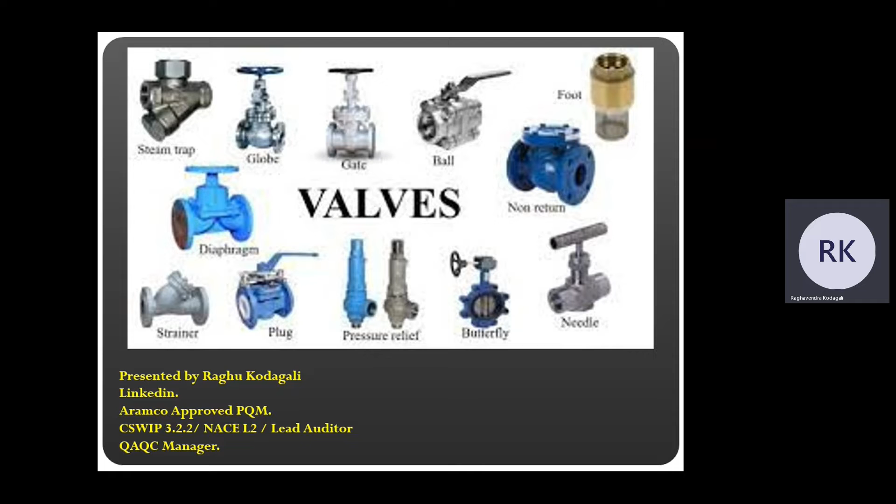We use a lot of industrial valves in the oil and gas sector, so valves are very important components in any piping system. Any QC inspector taking up CSWIP 3.1 will ultimately become a welding inspector, but also doing welding inspection, another part of the job is piping inspection. For piping inspection, you can take up other courses like API 570, but naturally you will have to learn these individual items. So this presentation will go a long way to help you understand these things. Let's proceed.

A lot of valve related information in this. Valves are mechanical devices specifically designed to direct, start, stop, mix or regulate the flow, pressure and temperature of the process fluid. Why do we call it process fluid? Because in oil and gas or any kind of industry, pharma or anywhere, the liquid that is being transported or is going to become a product is called process fluid.

In 1681, the first safety valve was invented by Denis Papin, and this information is historically important. By 1840s... so in the 17th century, we already know that in Europe the Renaissance was happening and a lot of developments were happening scientifically, so those days all inventions started.

By 1840s, the first valve patent was granted in the United States, and it went to James Robinson for his gate valve, one of the first valves which came into being, the gate valve, which got patented. So amongst all the various kinds of valves, you have to know that the gate valve got the first patent. In 1846, the globe valve design was developed and patented by Walworth.

And that's worth knowing. The Mercedes car built around 1901 introduced a butterfly valve in the fuel intake linked to the accelerator pedal, and that was a very big development. You have an accelerator where you are going to inject fuel into the engine, and to do that, Mercedes invented the butterfly valve, and that's how the butterfly valve first came into being.

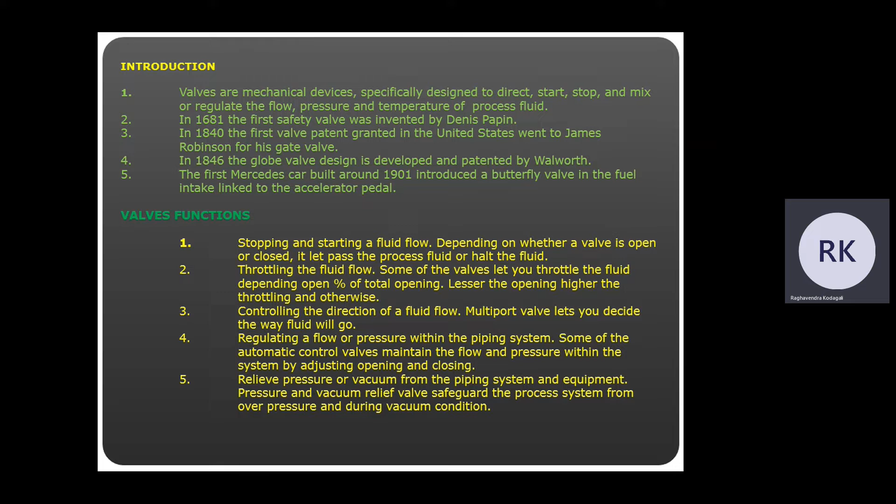Pressure relieving or vacuum relief from the piping system and equipment. Pressure and vacuum relief valves safeguard the process system from overpressure and during vacuum conditions. Ideally the valve functions not only as starting and stopping the liquid, but is also used as a safeguard mechanism, and to regulate the pressure, and during a vacuuming condition happening somewhere, the other side the valve can be kept a little open so the vacuum does not become so hard that it damages the whole system or piping.

So what is the basic construction of a valve? You can understand valve based on their construction, body construction also. The body is the main pressure containing structure of the valve and contains the valve internal parts that come in contact with working fluid. That is what the body's function is.

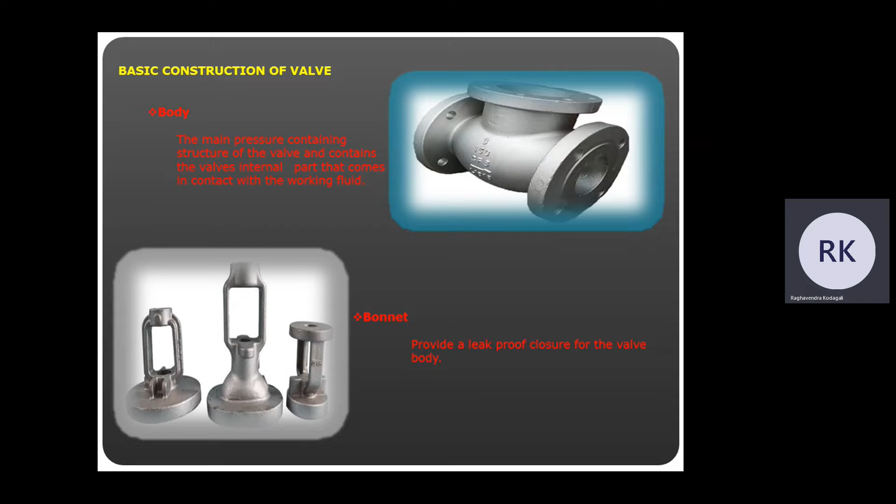Then on top of the valve, you will always see a bonnet, typically like a bonnet of a car, always on the top. It provides a leak-proof closure for the valve body. Between the valve body and the closure mechanism, which is either a disc or a handle, you will see a bonnet housing these kind of things with a seal, and it is leak proof so that it will provide valve opening and closing easily without any leakage.

Also the valves are classified as per the discs. What function does the disc have? The disc is a closure member of the valve, rests on the seat ring and is connected to the stem, which slides or screws up or down to throttle the flow using the handle. That's the function of the baffle.

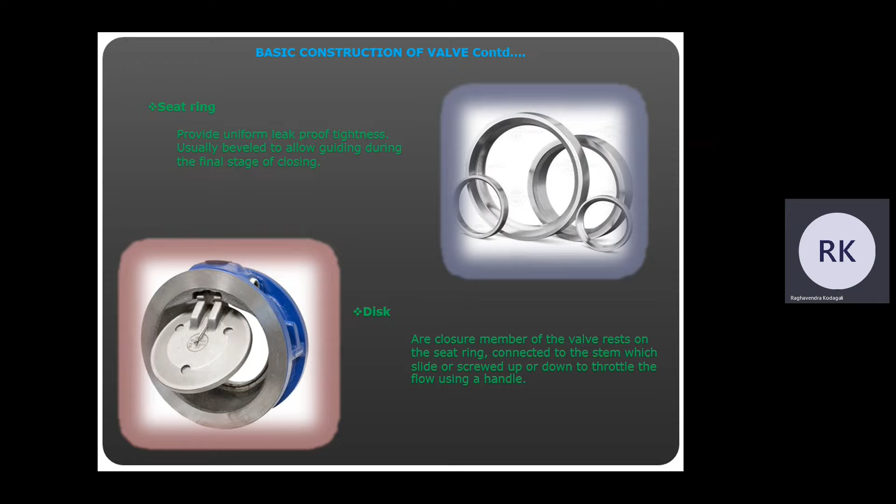In this case, we are showing you a check valve. This is like a non-return valve. The fluid will pass from one direction, and on the other side, if the fluid tries to go back, this baffle will close and it will not allow the fluid to go to the other side.

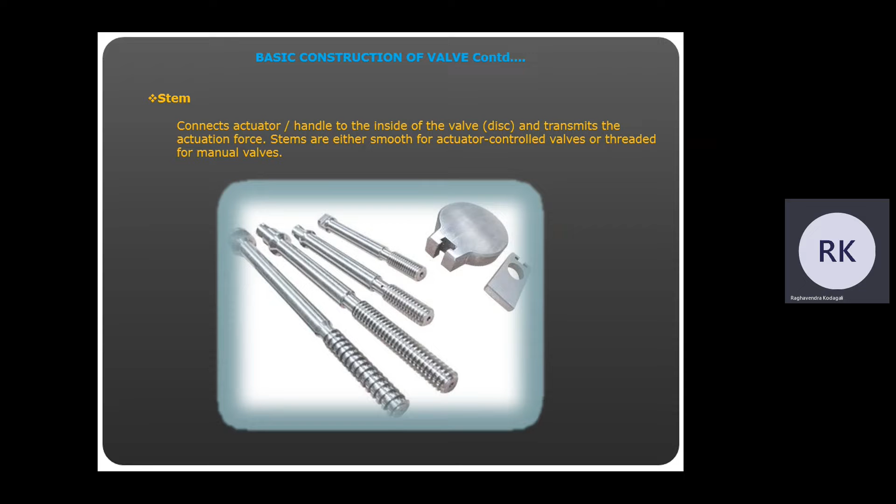So let's see the stem. In any valve, the closure mechanism is by a stem, because the operation of the baffle or any gate depends on this stem for operating it. It connects actuators or handles to the inside of the valve disc and transmits the actuation force. Stems are either smooth, for actuator-controlled valves, or threaded, for manual valves. You need to know this very precisely.

Let's see the classification of valves based on end connections. You can have different end connections: beveled end, screwed end, flanged end. Based on end connection, valves can either be screwed or threaded that connects with matching thread on the pipe. Small bore valves used in instrument connection or sample points have a threaded end. Majority of valves used in piping have flange type ends because flange type allows bolting, and you can remove the bolt anytime for shutdown during maintenance, or if you want to change the flange, easy. Welded type or threaded can also be changed easily, but mostly flanged type is used because you cannot guarantee the threaded type will not leak during operation.

Also, butt welded valves are used in very high pressure and high temperature service. In high temperature service, we see that threaded valves are not used. Rather, they use welded type because it gives complete guarantee due to the temperature and pressure range, and the need to withstand that pressure.

Socket welded valves are also used in low pressure systems. You might have seen many socket welded valves; these are usually low pressure systems. Many times you can see socket welded valves also used in housing and buildings. Check valves and butterfly valves are available in wafer and lug end construction. These type of ends are used when space is a constraint, so it's also because of the process requirement, basically, whether check valve or butterfly valve will be used.

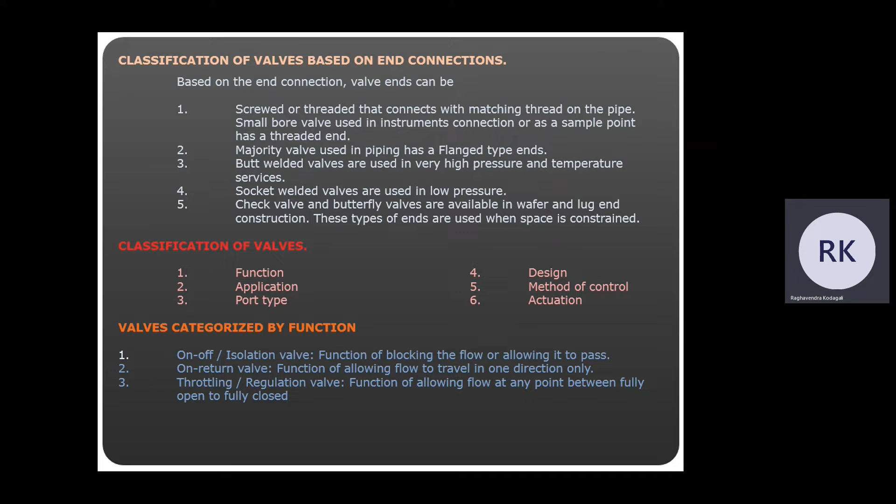Valves categorized by function: on or off isolation valve, function of blocking the flow or allowing it to pass. Non-return valve, function of allowing flow to travel in one direction only. And throttling or regulation valve, function of allowing flow at any point between fully open to fully closed.

Then for regulation, that is flow regulation valve: globe valve, needle valve, butterfly valve, diaphragm valve. So you can see diaphragm valve will do isolation also, and it will do regulation also. You need to know that. Ball valve is also having dual purpose.

Here the globe valve has the unique function of regulation. So globe valve is not doing isolation, it is doing regulation. Then there's ball valve, plug valve, and pinch valve. Pinch valve is also having dual purpose. What about safety relief valve?

Pressure safety relief valve and vacuum relief valve are the two types of relief valves you will see in the processes. And also non-return valve. Non-return valve, swing check valve, lift check valve, both types of check valves are there. They are called NRV or non-return valve.

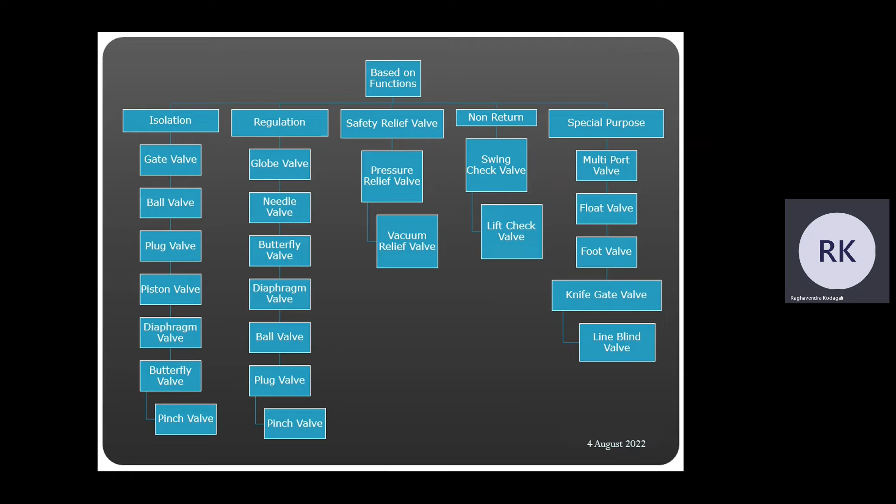And then there are special purpose valves built for multi-port valve, float valve, foot valve, knife gate valve, and line blind valve. For doing blind, they use the line blind valve. So these are the various types of valves and their segregation.

Now let's see how each one is constructed and how it looks like. So valve types used in the oil and gas industry or for process piping applications can be classified in multiple ways. Valve categorization by disc type.

Linear, first we will see a linear motion. So gate valve, you can see the picture of a typical gate valve. This is how a gate valve looks like, and many times a gate valve will have directions marked by a forged arrow. So gate valve is mostly used in piping and pipeline applications.

So you see how the construction is. This is a typical drawing. You can see this is the stem which will drive the disc inside, and it will completely close the flow from both directions.

So this one is the hand wheel. The top one you can see is the wheel, and the wheel has the stem which, when you rotate the wheel, will either rotate or go up or down. This is locked in place by the stem nut.

This is the stem itself, and there is a gland flange and gland bush that allow no leakage from the piping valves towards the stem. It will seal the thing basically. Then there is gland packing, back seat, bolt nut, bonnet, gasket. The bonnet houses all this and properly seals the valve. Then there is a gasket at this point.

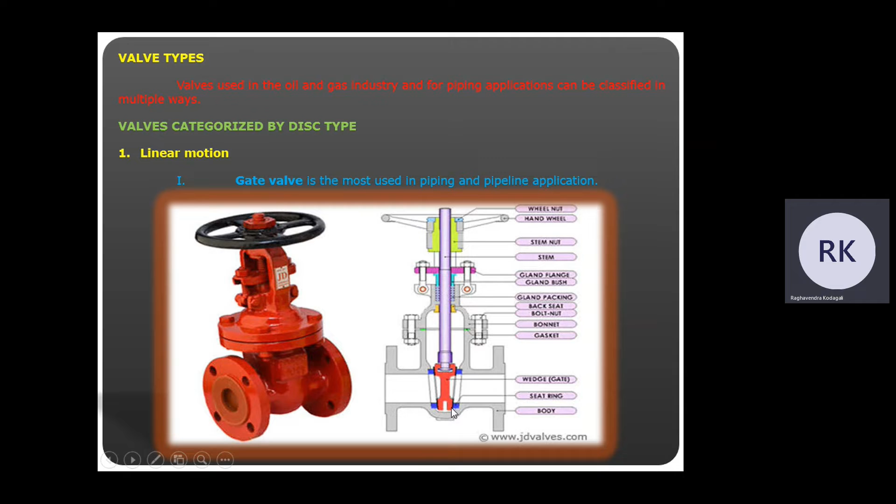There is also a back seat, you can see the yellow color. This allows that there will be no flow back charge into the handle side. On the valve side there is this wedge which is called the gate, and then a seat ring. This is the seat where the wedge will sit, and there is a seat ring for that. And of course this is the whole body in which it is housed.

So globe valve is used to throttle or regulate the fluid flow. In a globe valve you can see there is a circular rounded shape in between, and that's how you will identify them. Globe valve also will have some kind of direction mark, and many times it is unidirectional, but can be used either side. So you can see this is the handle, and then this is the drawing.

You can see the construction where it was straight. This one has an angular movement upwards and then downwards and sideways. You can see the direction here; the direction of travel is from this side to out. Then in between you can see the disc and seat, and the stem, and then the bonnet where it is housed, and then the hand wheel and the wheel nut.

In this picture you can see this is flanged end, whereas this is screwed or butt type.

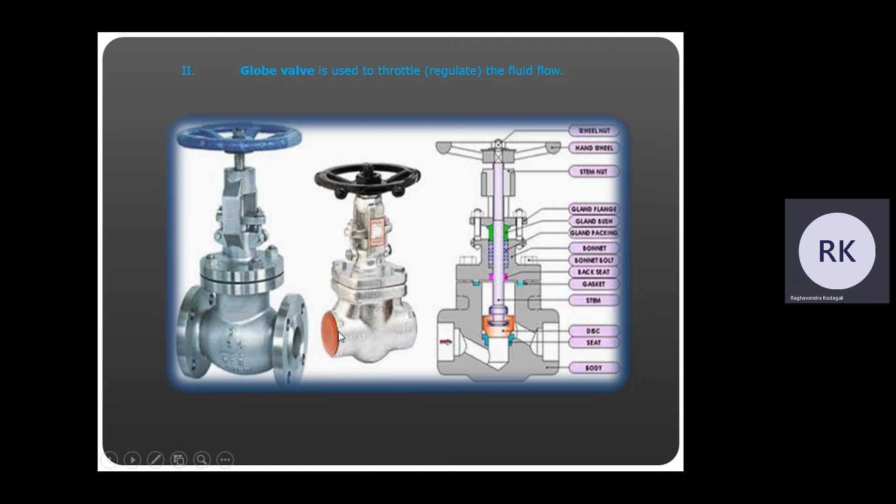This next slide is for the check valve. Check valve is used to avoid backflow in the piping system or pipeline that could damage downstream apparatus, pumps, and compressors. You can see, just like globe valve, this also has one kind of inlet, then there is a stoppage here, and then it will let it out. You can see if you cut the check valve and look, this is how it will look.

So this is the waffle, or where it will swing when the flow is on this side, and then it will not come out. So it will allow only one direction of travel of fluid.

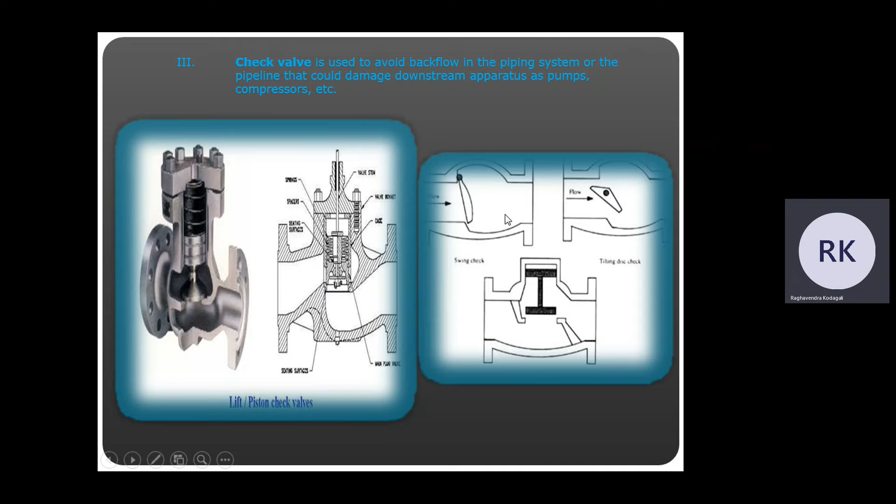The next valve is pinch valve. Pinch valve is a linear motion valve that can be used for throttling and shutting off applications in piping application, process applications that handle solid materials, slurries, and dense fluids. That's the reason why we don't see pinch valve used often in refineries and oil processing platforms. Usually in land refineries you will find this, but the application is very limited to solid materials, semi-solid liquids, slurries, and dense fluids, and that's why we don't see much use of these kinds of valves. But you should know that this kind of valve exists.

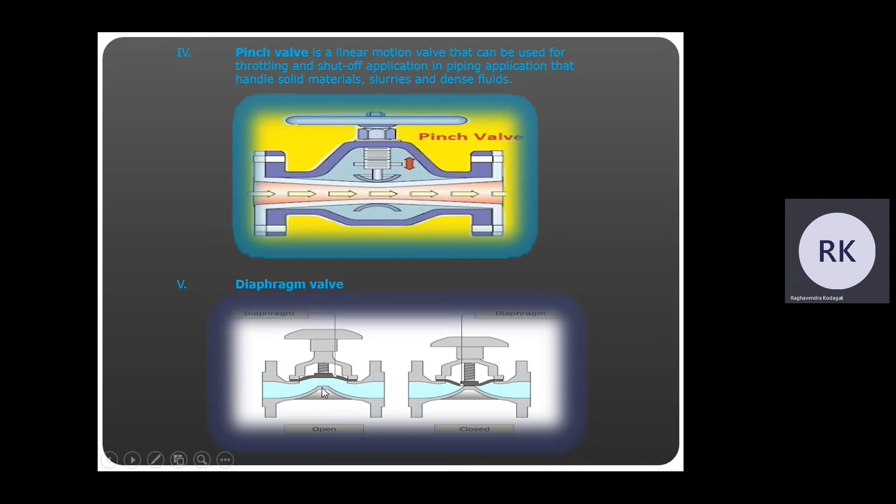Then there is a diaphragm valve. You can see how clearly there is a diaphragm which, when pressed down, is able to close the flow of direction.

You can see this cut section of pipe, and how the waffle, when you turn this stem, opens like a waffle, and then firmly sits in one location and swivels from there. This is the typical valve arrangement, with the rubber sealing and this plate completely dressed with a smooth finish. When you close it, it completely seals off against the rubber and shuts off the flow from one side to the other.

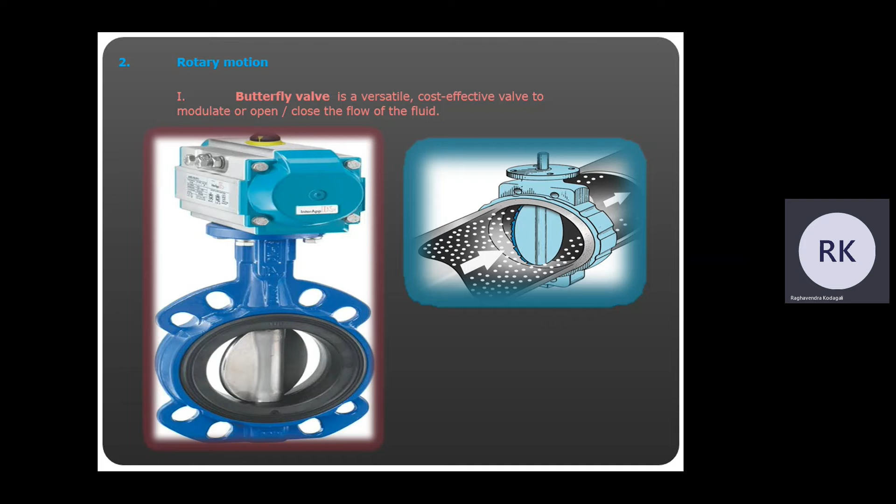The next valve is the ball valve. It has a circular hollow section in the ball, which is encapsulated in the body. Since it is in a circular ball shape, it's called a ball valve. It has a handle, and you simply turn it 90 degrees, and the operation happens slowly. See, this is completely shut off, this is slowly opening, half valve, and this is fully closed, and the blue one is fully open.

So ball valve construction is this way, and it also has the bonnet and the body, completely housed inside a stainless steel body here in this case, but there are also carbon steel ball valves.

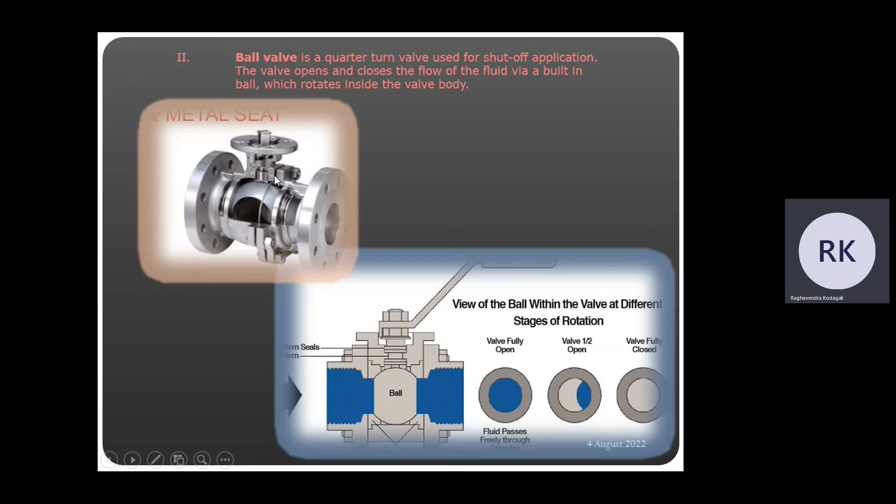There is rotary motion control. A plug valve is classified as a quarter turn valve for shut-off application. Eccentric valves and swing check valves are other kinds of rotary motion valves. So these valves operate using the rotary motion of the disc inside.

What about quarter turn? The device requires approximately a quarter turn motion, from 0 to 90 degrees of the stem, to move from fully closed to fully open position, or vice versa. So in a quarter turn valve, if you turn the handle by a quarter, which is 90 degrees - 360 degrees, quarter is 90 - the valve opens or closes.

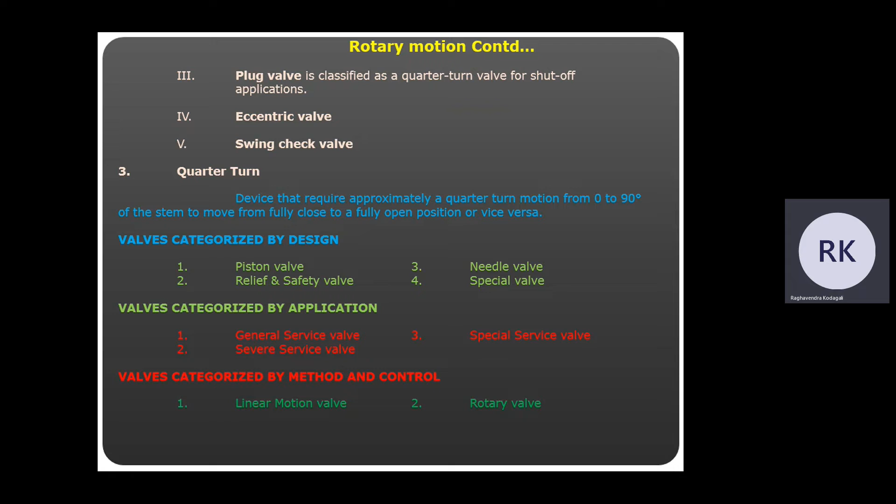Valves categorized by design: piston valve, relief safety valve, needle valve, and special valve. Valves categorized by application: general service valve, severe service valve, and special service valve. Valves categorized by method of control: linear motion valve and rotary valve. Valves categorized by port size: full port valve and reduced port valve, so you have full ports and reduced ports available in valves.

Classification of valves based on the type of actuator: based on actuation, there is pneumatic actuation, hydraulic actuation, and electrical actuation. A manual valve is operated manually by a lever, wheel, or gear, while an automatic valve is controlled by an electromechanical device called an actuator, which may be electric, pneumatic, hydraulic, or gas-over-oil, called an actuation valve.

Based on operation, manual valves can be hand wheel, hand lever, gear wheel, or sometimes even chain type. But in actuation, you can have power or automatic operation. In power, you will have electric, pneumatic, air, hydraulic, and solenoid valves.

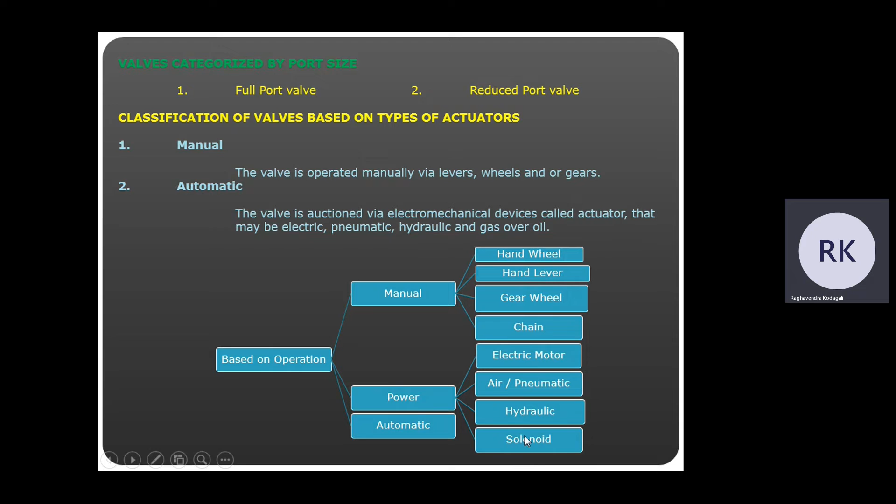So let's see how these valves are inspected and tested, because every inspection is carried out by the inspector, so he should know all the details.

When you go to the valve manufacturing facility, not every QC inspector gets this kind of experience and inspection opportunity. Very few people get to go into the valve manufacturer's place and do inspection. The purchaser will specify in the purchase order his intention to inspect the valves and witness tests and examinations at the manufacturing plant. The purchaser's inspector shall have free access to any part of the plant concerned with manufacturing the valves whenever work on the order is underway.

So what happens is when there is a large order of valves and a very big size of order, the client - for example ADNOC or Saudi Aramco, or any large EPC company or field operator - since their project is big size, they would want to witness this activity.

So not only will the client and end user witness the inspection, many times a third party will also do the witnessing. In that case, there will be an ITP, and a QC inspector will be in charge of the inspection for the vendor. The vendor will have that ITP, and then they, along with the valve manufacturing company, will chalk out which stages the inspection will be done, when the RFI will be sent, and the whole process of RFI will take place.

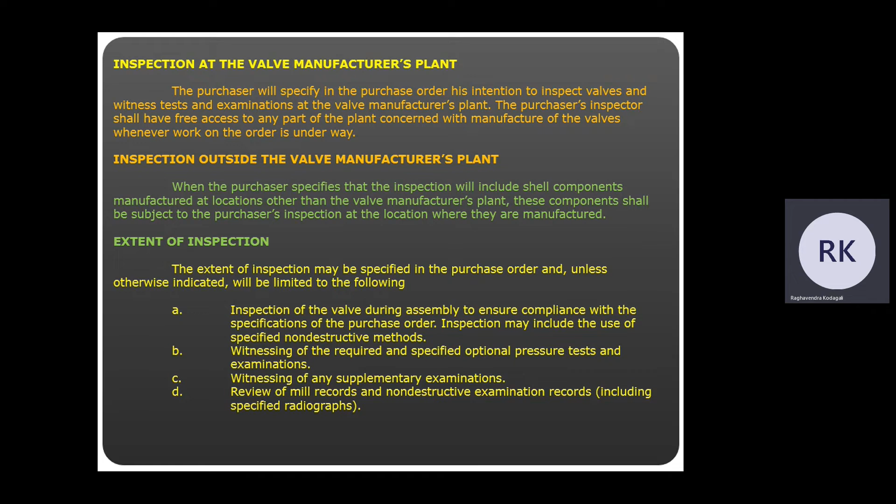So they may want to witness the entity also, because since it is a cast valve or forged valve, they need to see the proper processes. So witness of the required and specified optional pressure test and examinations, then witnessing of any supplementary examinations, then review of MTC mill test record certificates and NDT records, including radiography or UT results.

And if you place a purchase order for a valve which requires DNV acceptance, then that DNV third party will come into play. If you are using this valve in marine application, then the DNV marine third party will have to be called. Then if there is a PED valve, the third party must be a PED notified body. What I mean by PED valve is many times valves are made to ISO standard and supplied to a European company or European project - that time ISO standard requirements are there along with PED standards, and that's why you need a notified body. A notified body is the third party which is basically in touch with the European country's notified bodies. And that's why the QC manager and QC engineer will know that, and they will write all that in the purchase order.

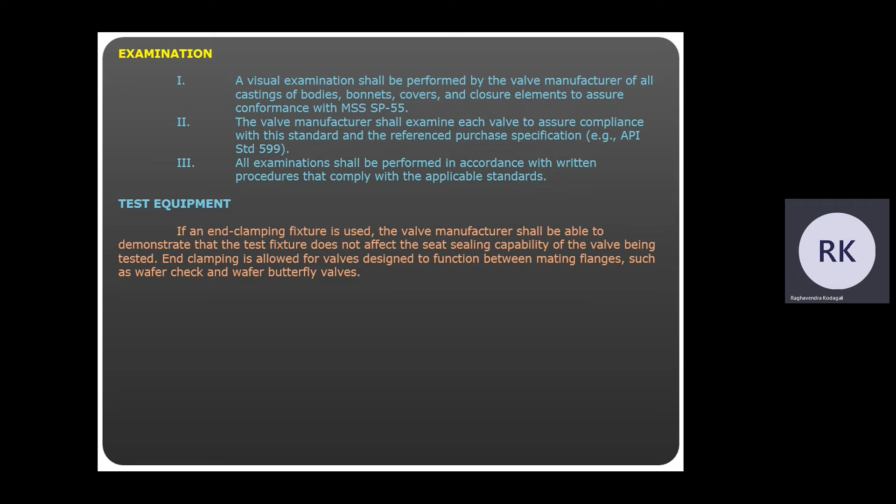So this testing is also very important, and very experienced and knowledgeable persons go for witnessing the hydro test. Basically for the hydro test, they make one test bench where they may put 10 valves together and test in one go, or they may test individually.

So, pressure test of the valves below 4 inch and above 4 inch, for below 1500 pound and then below 600 pound flange rating - you can see that the requirement for shell is required for all things like gate valve, globe valve, plug, check, floating and butterfly valve. But backseat test is applicable only for gate and globe valve, and not applicable for valve types like plug, check, floating ball, and butterfly valve. So you should know this.

If you want, you can keep this table in your office, whoever is doing valve checking always. Low pressure closure is required only for gate valve. It's optional for globe valve. For plug valve, it is required. Again, it's optional for check valve. It is required for floating ball valve and butterfly valve.

Then high pressure closure test is optional for gate valve, plug valve and floating ball valve, but it is required for globe valve and for check valve also.

So let's see the notes also. The back seat test is required for all valves except for bellows seal valves that have the back seat feature. That is because of the make and construction. Not all valves are required for the back seat to be tested.

For lubricated plug valves, the high pressure closure test is mandatory, and the low pressure closure test is optional. Lubricated plug valves are very important and are supposed to be closed at high pressure, so naturally the high pressure test is required for them. When the purchaser specifies an optional test, it shall be performed in addition to the required test. So if it's told optional, we have to always check the purchaser specification - maybe it's required there, then you will have to do it.

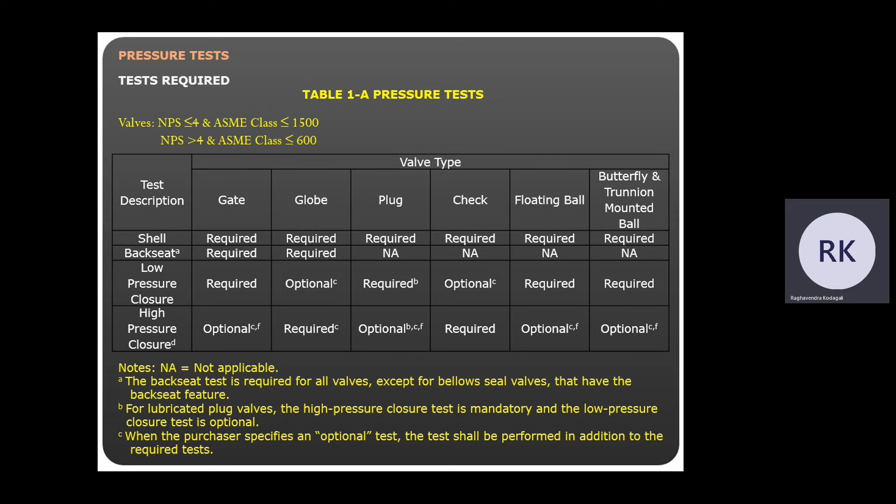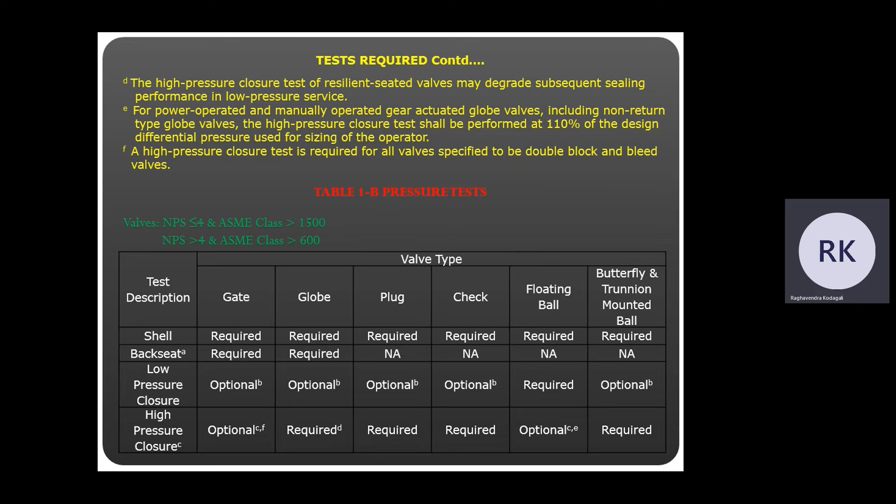High pressure closure test of resilient seated valves may degrade subsequent sealing performance in low pressure service. For power operated and manually operated gear actuated globe valves, including non-return globe valves, high pressure closure test shall be performed at 110% of the design differential pressure used for sizing of the operator. High pressure closure test is required for all valves specified to be double block and bleed valves - so for those, high pressure test is of course required. And pressure tests, again I am giving you the same chart and you can see the requirement here.

So backseat test is required for all valves except for bellows seal valve - I think this is again repeated. For power operated, manually operated gear globe actuated globe valve, including non-return globe valve, high pressure closure test shall be performed at 110% of the design differential pressure used for sizing of the operator.

So high pressure pneumatic shell test, when specified by the purchaser or purchase order, shall be performed. This test shall be performed after the hydrostatic shell test - so you can see that along with the hydro test, air test is also asked for. So pneumatic test is required along with hydrostatic test, at the same maximum allowable pressure - 110% of the max allowable pressure at 38 degrees, or as specified by the PO. Visible leakage is not allowed at all, zero.

What about the test fluid? The test fluid for shell, high pressure backseat and high pressure closure test shall be air, inert gas, kerosene, water, or non-corrosive liquid with a viscosity not higher than that of water - so they want a liquid which is not as viscous as water, unless otherwise specified in the purchase requisition.

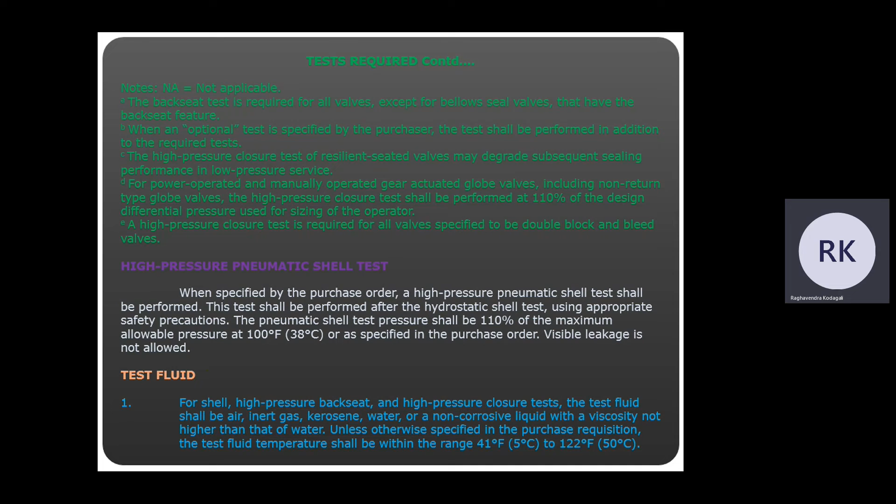Test fluid temperature shall be 5 degrees to 50 degrees only. The reason for not wanting viscosity higher than water is that the leakages are not known - if it is water or higher, it will tolerate more leakage. And in the oil and gas field, the leakage tolerance requirement is very, very less.

For low pressure closure and low pressure backseat tests, the test fluid shall be air or inert gas. When air or gas is used for closure, shell, or backseat tests, the valve manufacturer shall be capable of demonstrating the adequacy of the method of leakage detection. Water used for any test may contain water-soluble oil or rust inhibitors, because we are dealing with valves and we don't want to put rust in these valves.

When specified by the purchaser, a wetting agent shall be included in the water for testing austenitic stainless steel valves. Water with chloride content not exceeding 100 ppm shall be used, and the valve manufacturer shall also be able to document the chloride content. So as an inspector, you will have to ask them, if you are using water, show me the chloride content tested by an independent lab, and also what wetting agent and corrosion inhibitor you have used, and whether it is compatible. You have to send this corrosion inhibitor to your engineering and ask them to approve it before they are using it.

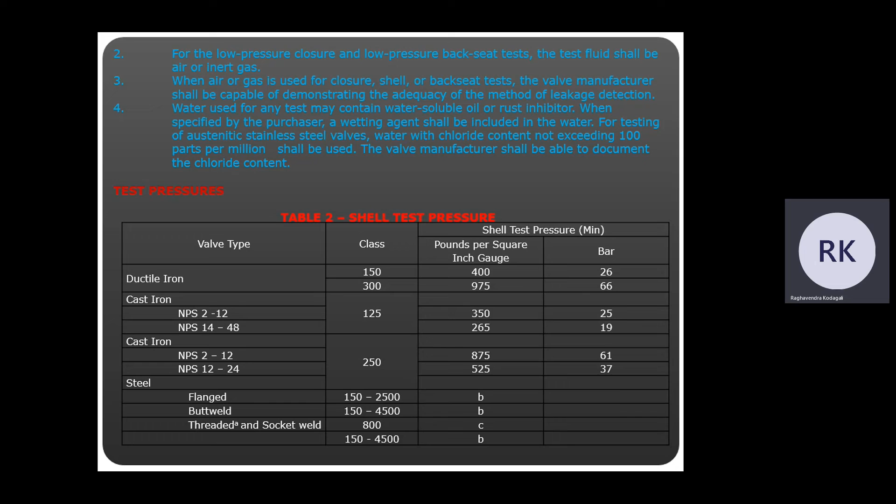Some test pressures I have mentioned here for cast iron, steel, all kinds of flanged valves, and shell test pressure also. ASME B16.34 limits threaded end valves to class 2500 and lower. And as per B16.34, for class 800 valves, the shell test pressure shall be 1.5 times the pressure rating at 38 degrees, rounded off to the next higher increment of 25 psig or 1 bar. See, that's table 2 of API standard 602, which gives you this kind of requirement for test pressure.

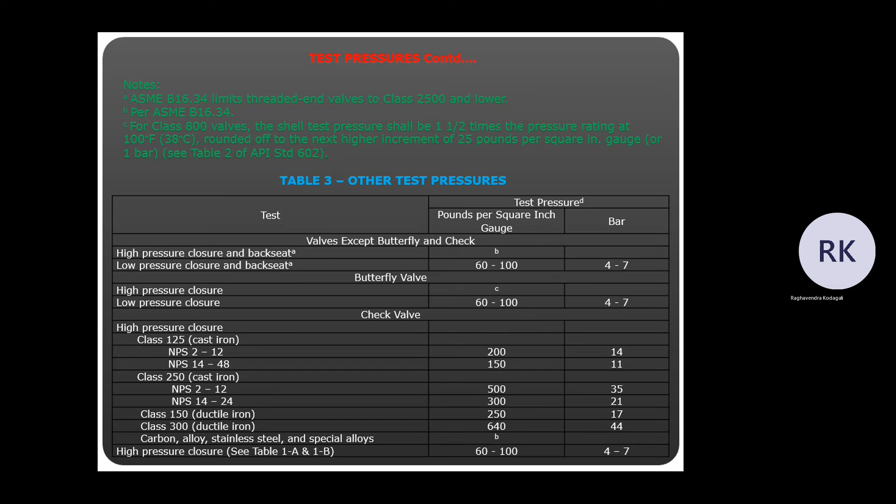The backseat test is required for all valves that have this feature - wherever there is a backseat in the valve, it will require the backseat test. And the pressure is, as you know, 110% of the max allowable pressure at 38 degrees. Then test duration: for each type of test, the required test pressure shall be maintained for at least a minimum time. As you can see, the diameter here - valve size in NPS - and the backseat feature for the shell, backseat, and closure tests - this is the time duration required.

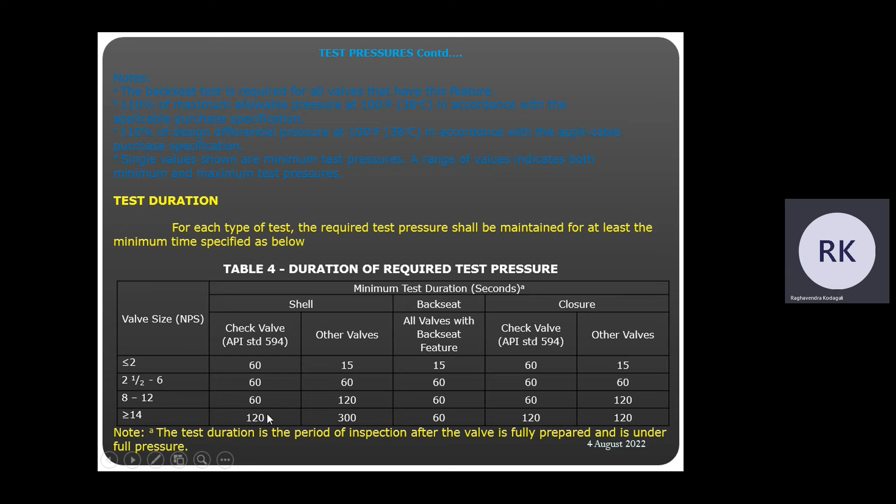So shell test, stem seal, backseat. For shell test, visually detectable leakage through the pressure boundary wall and any fixed body joint is not permitted. For backseat, visually detectable leakage is not permitted.

For valves with adjustable stem seals, leakage through the stem seals during the shell test shall not be cause for rejection. However, manufacturers shall demonstrate stem seals are capable of retaining pressure at least equal to the valve rating without visible leakage.

For valves with non-adjustable stem seal, O-ring, fixed seal rings and the like, visually detectable leakage during the shell test is not permitted. Where no visually detectable leakage is permitted, the following definitions apply. If the test fluid is liquid, there shall be no visible evidence of drop or wetting on any external surface of the valve. So that's something you need to know as an inspector.

If the test fluid is air or inert gas, no leakage will be revealed by an established detection method. Maybe if you are using air, you have to put soap solution to find if there is any leak or not.

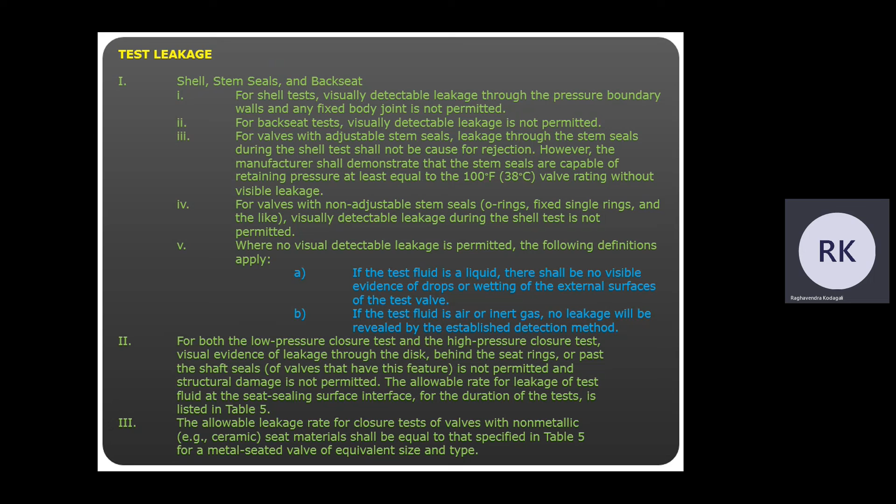So these are the things which are becoming more and more stringent and are applied in oil and gas.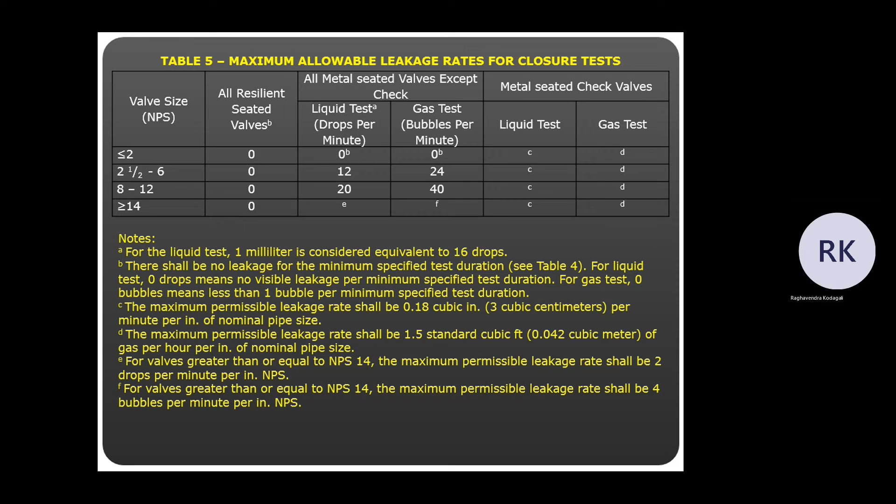What about the test procedures? The pressure test procedure for a valve designed to permit emergency or supplemental introduction of injectable sealant to the seat area shall be tested with the injection system empty and not in use, except for lubricated plug valves.

So when liquid is used as the test fluid, the valve shall be essentially free from trapped air during the test. The required protective coating, such as paint, which may mask surface defects, shall not be applied to any surface before the inspection and pressure test.

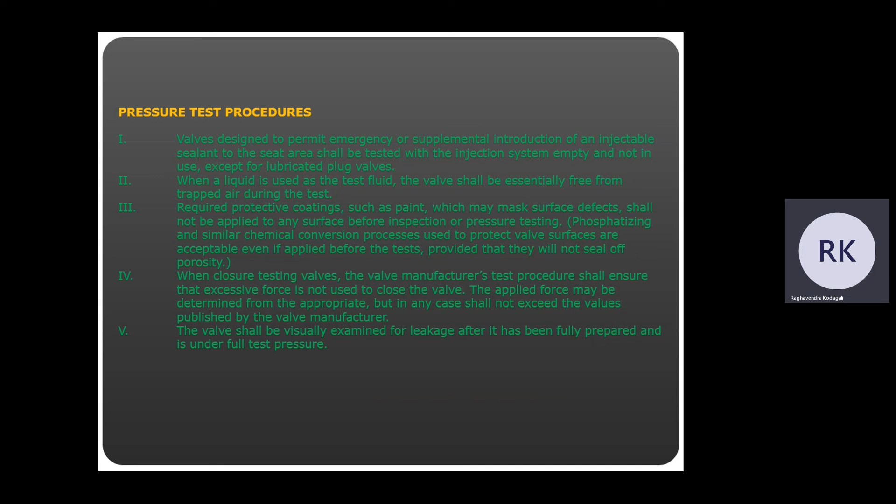What about the backseat test? Because we have been talking about backseat test. Backseat test is required for all valves except bellows seal valves that have a backseat feature, and shall be performed by applying pressure inside the assembled valve with the valve ends closed, the valve fully open, and the packing gland loose or packing not installed.

So if the backseat test is performed after the shell test, then the packing shall be installed and the packing glands retightened after the backseat test. Successful completion of this backseat test shall not constitute a recommendation by the valve manufacturer that while the valve is pressurized, the valve stuffing box may be repacked or packing may be replaced.

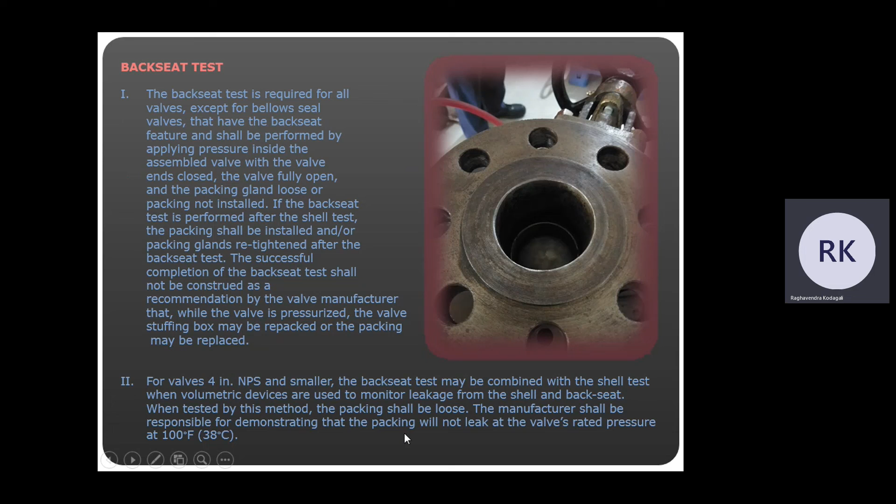For valves in 4-inch nominal pipe size and smaller, the backseat test may be combined with the shell test. When volumetric devices are used to monitor leakage from the shell and the backseat, the packing shall be loose. The manufacturer shall be responsible for demonstrating that the packing will not leak at the valve's rated pressure at 38 degrees.

Let us see the shell test. The shell test shall be made by applying pressure inside the assembled valve with the valve ends closed, the valve partially open, and any packing gland tight enough to maintain the test pressure, except for the bellows seal valve testing the stuffing box.

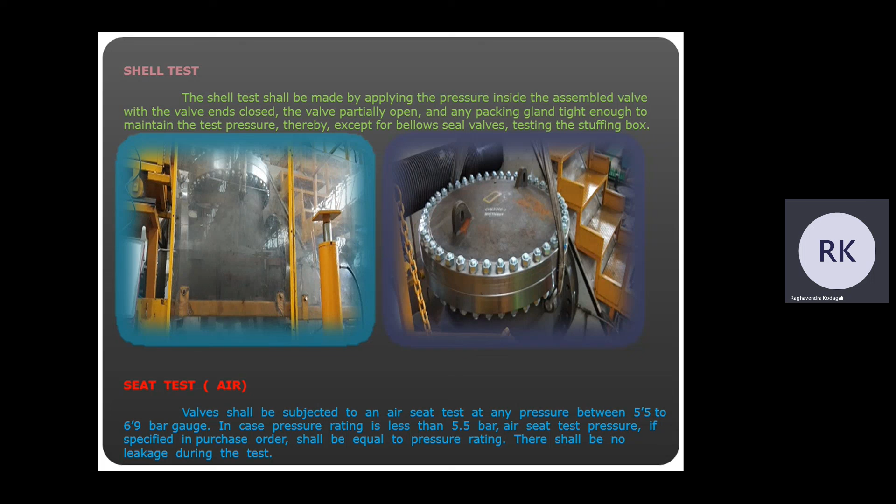Air test. Valve shall be subjected to air test at any pressure between 5.5 to 6.9 bar gauge. In case pressure rating is less than 5.5 bar, air seat test pressure, if specified in the PO, shall be equal to the pressure rating. There shall be no leakage during the test.

On valves intended for low differential pressure service or vacuum service, a low pressure air test or air seat test shall be carried out by the manufacturer, as specified in purchase order. Test pressure shall then be specified by the purchaser and witnessed by the purchaser representative. If so desired, the pressure shall be applied as in a globe valve under the disc.

For check valves, the test is not required. For gate, plug and ball valves, pressure shall be applied successively to each side of the closed valve. For valves designed for flow in one direction only and so marked on the valve, pressure shall be applied on the upstream side of the valve only.

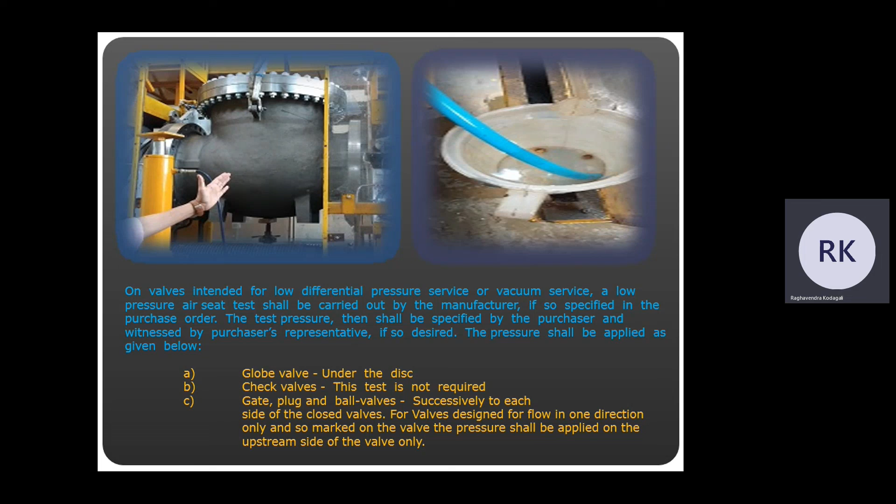Seat test. In this case, the valve shall be in the closed position with the side not under pressure open to atmosphere for detection of leakage.

For valves in double block and bleed application and for valves with independent double seating, pressure shall be applied inside the bonnet or body with the disc closed and both sides open for inspection.

Plug and ball valves shall be operated from fully closed to fully open position 3 times to demonstrate satisfactory mechanical operation and continued tightness after operation. It is permitted to charge sealant before testing on valves relying on sealing compound to effect the seal.

Then hydrostatic seat test, because till now we were doing air test. So the seat test shall be made with seat clean and free of oil. However, if necessary to prevent galling, the seat may be coated with a film of oil of viscosity not greater than that of kerosene. This requirement does not apply to the valve in which the lubricant provides the primary seal.

The seat test shall be carried out by closing the valve in the normal manner. The valve shall be subjected to hydrotest pressure at gauge pressure not less than 110% at 38 degrees, rounded off to the higher 1 bar increment. This shall be applied as specified in the seat test. There shall be no visible leakage during the test.

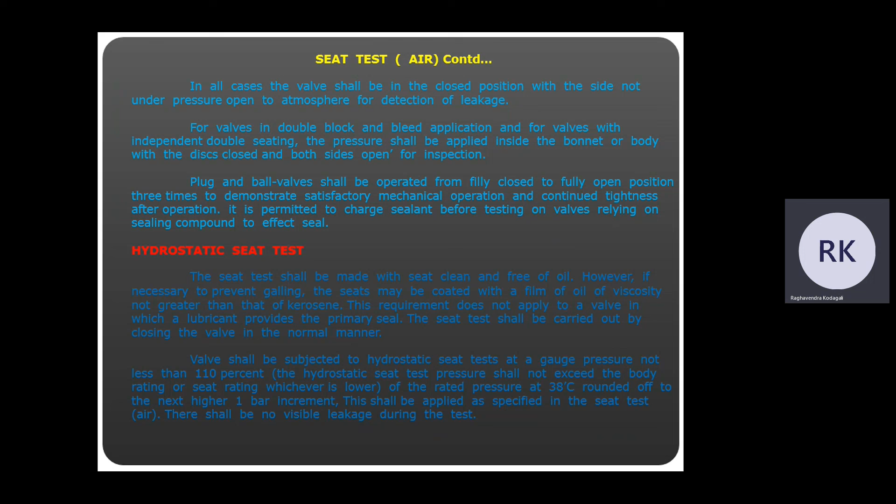For check valves, the hydrostatic seat pressure shall be applied on the downstream side. In addition to this, the check valve shall also be tested on the downstream side to 25% of the hydrotest pressure. So here also no leakage is allowed.

What about the low pressure closure test and high pressure closure test? These are special tests, fire safe tests. When required and specified in the relevant Indian standard, these tests shall be carried out as per agreed procedure and requirement between the manufacturer and the purchaser.

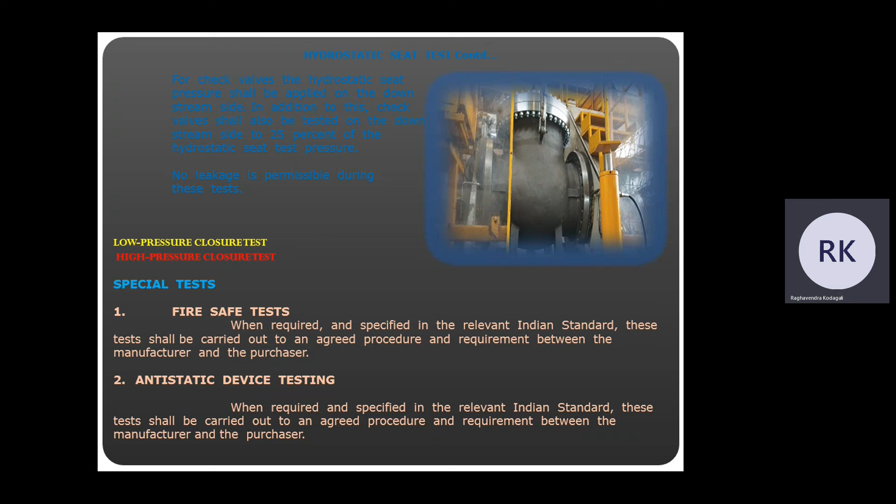Anti-static device testing. When required and specified in the relevant Indian standard, this shall be carried out as per an agreed procedure and requirement between the manufacturer and the purchaser.

Test gauges. The gauge used for pressure test shall be calibrated at intervals not exceeding 3 months by an independent competent authority. If the manufacturer does not have the facility, results shall be recorded and shall be liable to inspection and verification of the purchaser representative for acceptance, as when required.

In all the pressure tests, pressure shall be measured for a stated duration without continuous use of input to build up pressure by mechanical or other means. So you should not be pressurizing it while it is under pressure, holding the pressure.